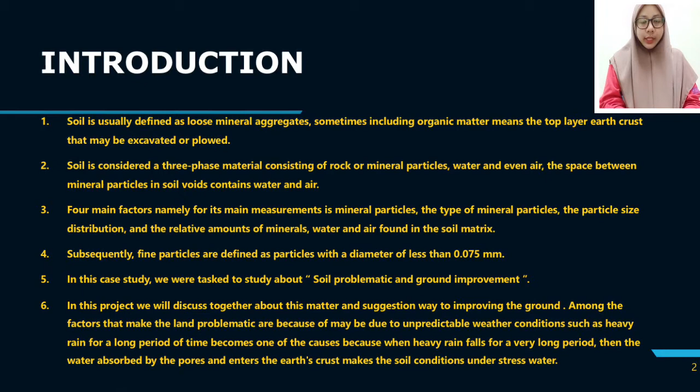So I will present about my part for the introduction. Okay, first we need to define what is soil. Soil is usually defined as a loose mineral aggregate, sometimes including organic matter, meaning the top layer of the earth crust that may be excavated or plowed.

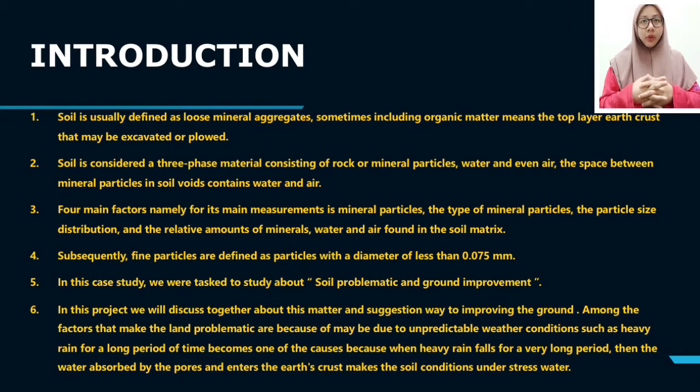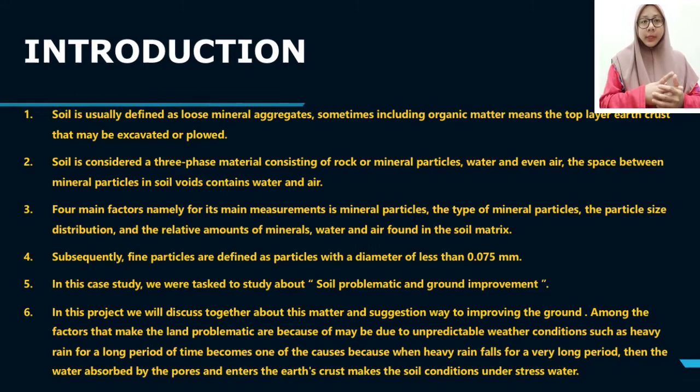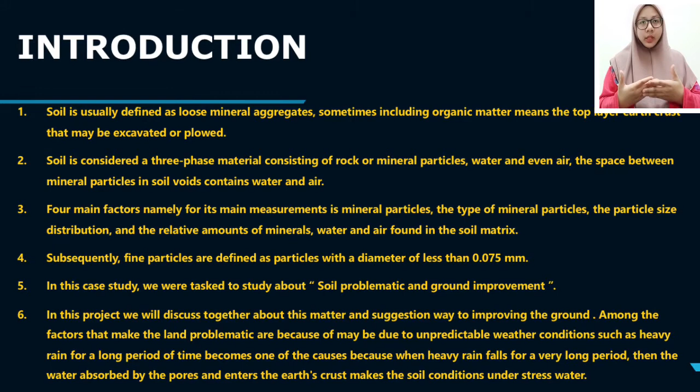And subsequently, fine particles are defined as particles with a diameter of less than 0.075 mm. So in this case, we were tasked to study problematic soil and ground improvement. In this project, we will discuss this matter together and suggest ways to improve the ground.

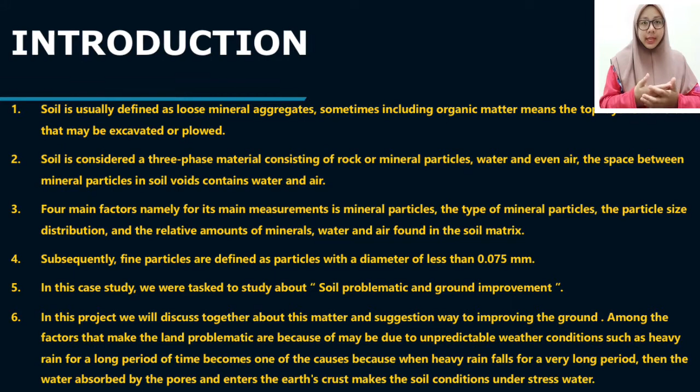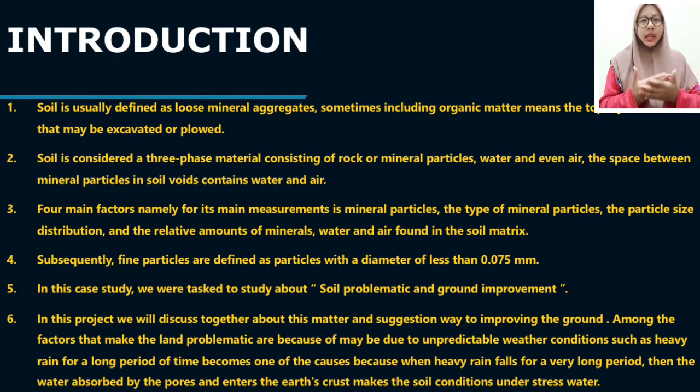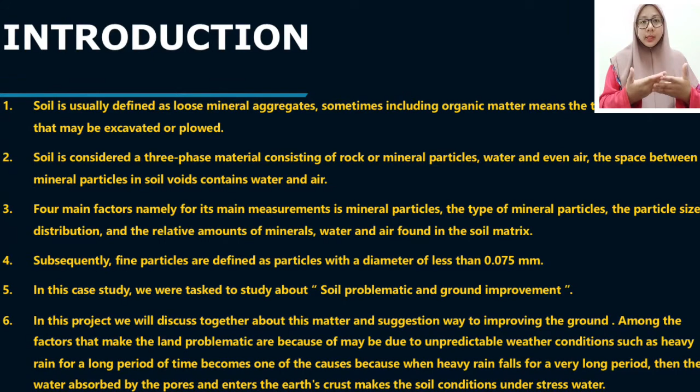Among the factors that make the land problematic may be the unpredictable weather conditions, such as heavy rain for a long period of time, because when heavy rain falls for a very long period, the water is absorbed by the pores and enters the earth crust, putting the soil under water stress.

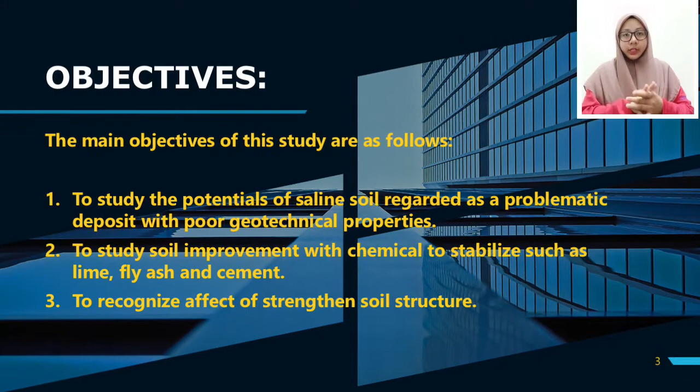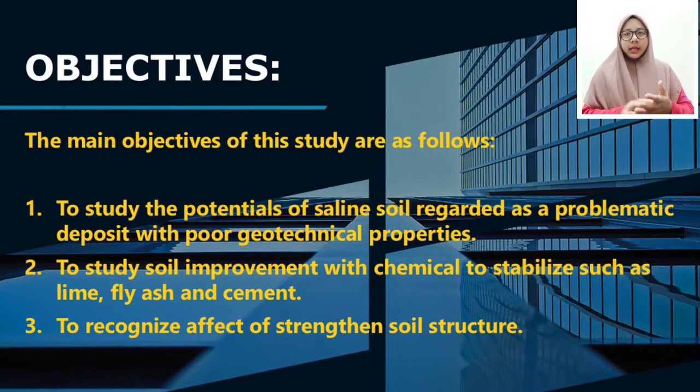For the objective, there are three main objectives for these studies. The first one is to study the potential of saline soil regarded as a problematic deposit with poor geotechnical properties. The second objective is to study soil improvement with chemical stabilizers, such as lime, fly ash, and cement. And the last, to recognize the effect of strengthen soil structures.

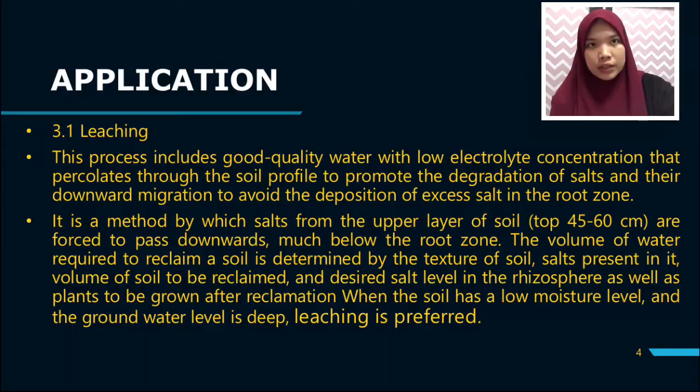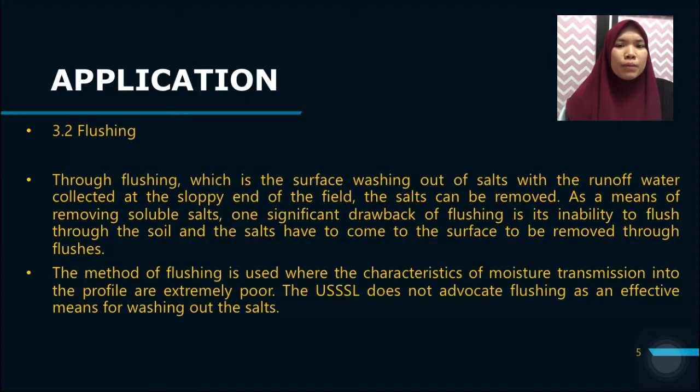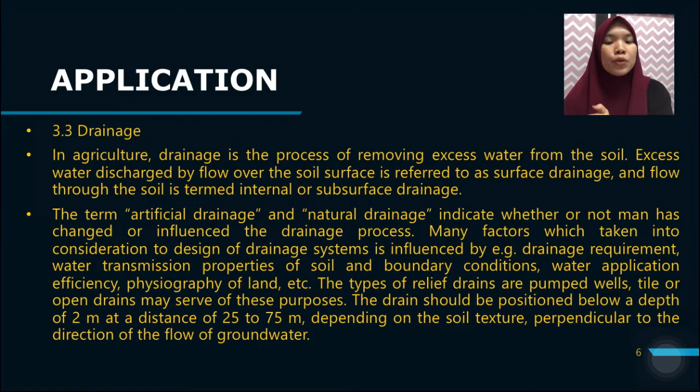It is influenced by the drainage requirement, the water transmission property of soil and boundary conditions, water application efficiencies, physiography of land, and so on. The types of relief drains are pumped wells, tiles, or open drains, and they may serve this purpose. The drain should be positioned below a depth of 2 meters and at a distance of 25 to 75 meters depending on the soil texture, and perpendicular to the direction of the flow of groundwater.

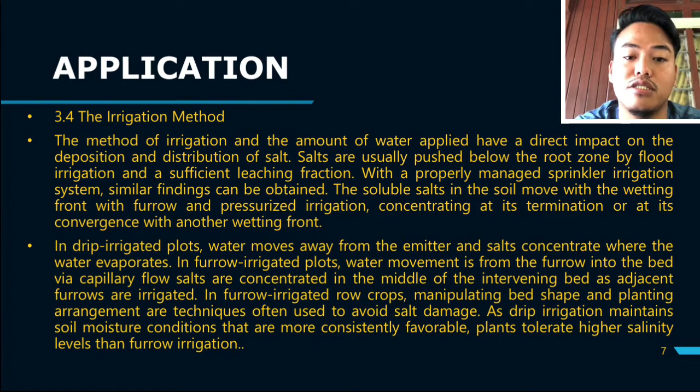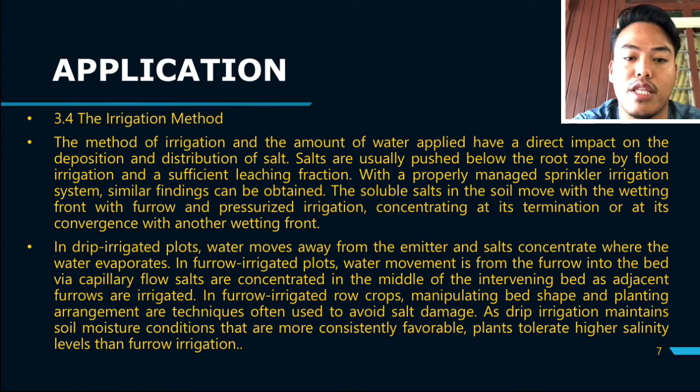For my part, I will explain about application, the irrigation method. The method of irrigation and the amount of water applied have a direct impact on the deposition and distribution of salt. Salts are usually pushed below the root zone by flood irrigation and a sufficient leaching fraction. In drip irrigated plots, water moves away from the emitter and salt concentrates where the water evaporates.

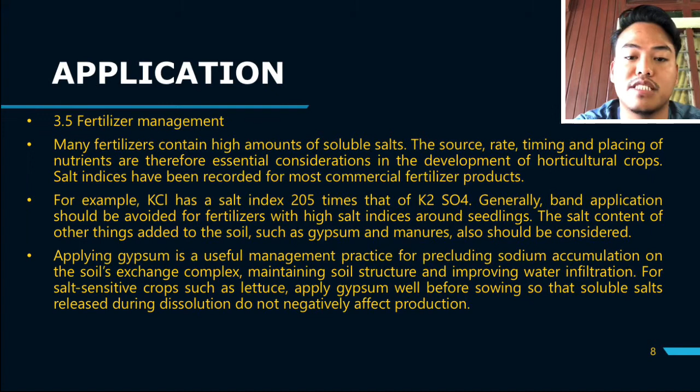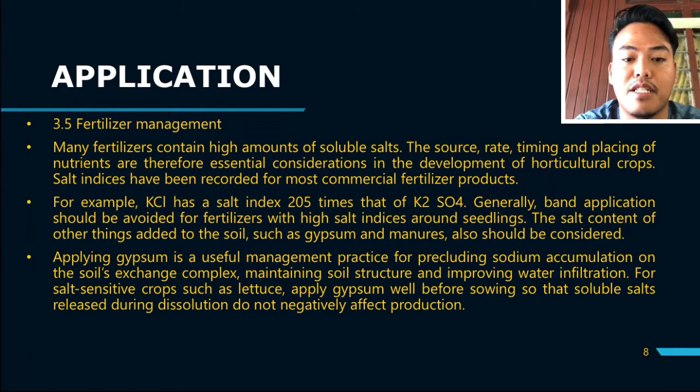Fertilizer management. Many fertilizers contain high amounts of soluble salt. For example, KCl has a salt index 2.5 times that of K2SO4. Generally, band application should be avoided for fertilizers with a high salt index around seedlings. Application 3.6, soil amendment and water treatment. Soil amendment and water treatment also provide a practical and cost-effective way of dealing with certain issues common to saline and sodic soil. Soil application of amendments is used for initial reclamation and long-term maintenance of soil quality.

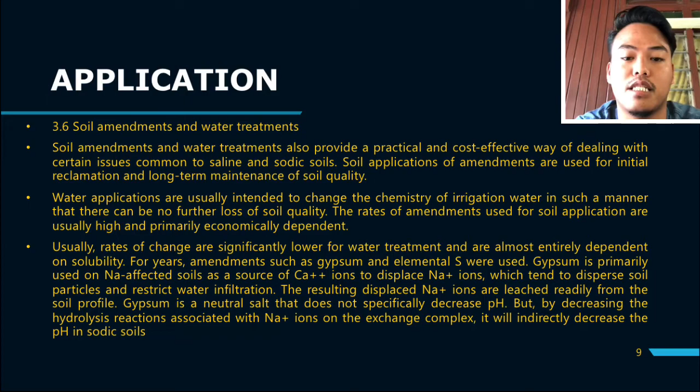So, I will explain about the case study. The type of soil that we use in this study is saline soil. Saline soil is when salt is present in the soil, blended in with water, and travels to the surface of the soil. Saline soil has mostly sodium chloride present in it. Saline soil can also be perceived by inconsistent development of harvest and regularly by the presence of a white crust on the surface. Soil salinity can also happen during irrigation. Soil that was once used for agriculture before construction can be saline, because during irrigation roots only absorb water, leaving salts behind in the soil, because every water source has some salt present in it.

As for saline soil, the causes and symptoms of salinity, sodicity, specific ion toxicity, and high pH are frequently confused. Salt is a constituent of nearly everything in nature. When there is groundwater fluctuation where salty water is discharged, or where topsoil is removed to reveal saline subsoil, natural salt deposits will occur.

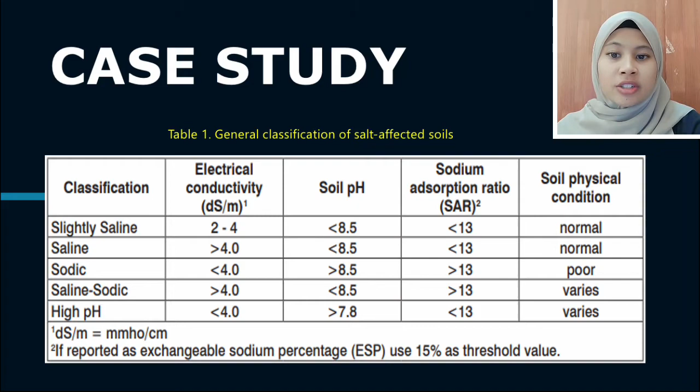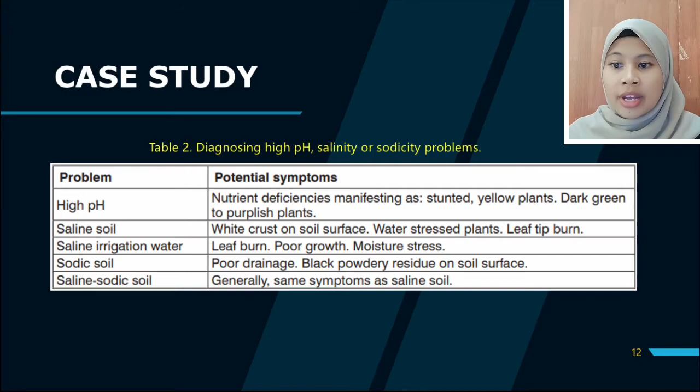And for sodic soil, it is poor drainage and black powdery residue on the soil surface. And the last one is saline sodic soil, where it's generally the same symptoms as saline soil.

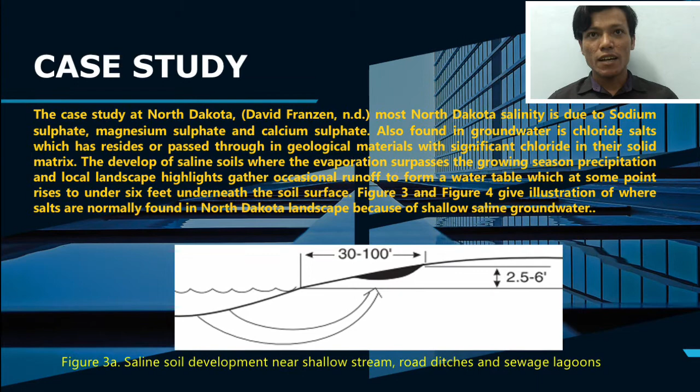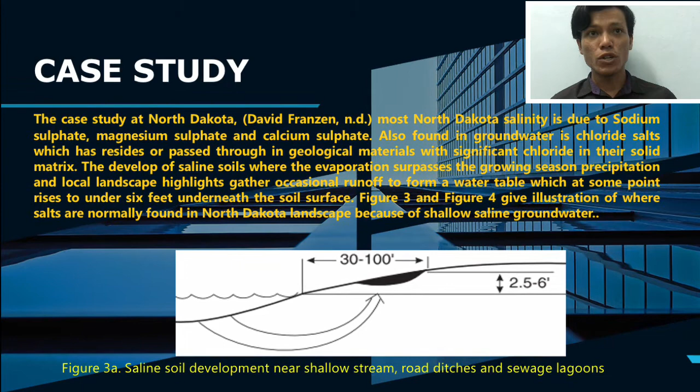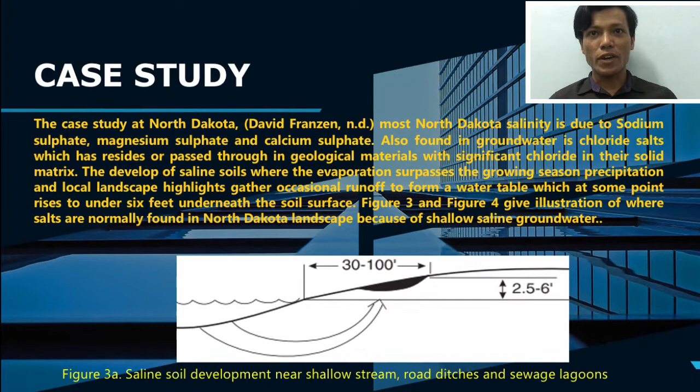I will present about the case study. The next case study is in North Dakota by David Franzen. Most North Dakota salinity is due to sodium sulfate, magnesium sulfate, and calcium sulfate. Also found in groundwater is chloride salt, which has resided in or passed through geological material with significant chloride in their solid matrix. Saline soil developed where evaporation surpassed the growing season precipitation and local landscape lowlands gathered occasional runoff during the growing season.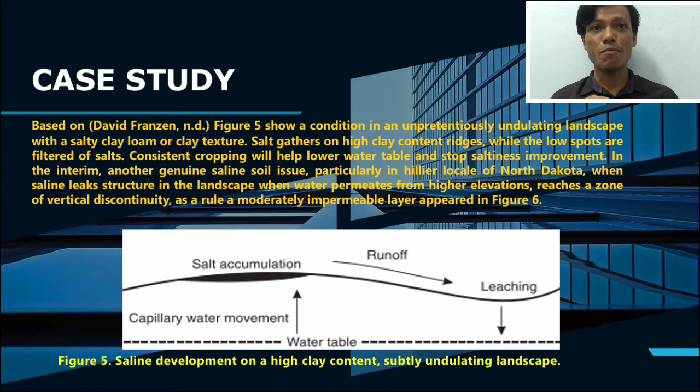Based on Mahmood Abdul Moeez from a 2016 case study, saline soil can diminish the moisture content of the soil and make it dry and rough. Moreover, the unit weight of the soil increases, along with physical problems such as high compressibility, low bearing capacity, and more expansion. The effect of dissolved salts on plant growth relies upon their concentration in the soil solution, which is measured at the standard field moisture content because of sampling problems.

Based on David Franzen, soil areas that are severely affected by salt often have a bright white, crusty appearance when dry. The severity of the saline area usually extends well beyond the obvious area. In areas lacking a surface crust or obvious vegetation loss, salts are dissolved in soil water and cannot be seen. So, modifying water management through appropriate irrigation practice is appropriate.

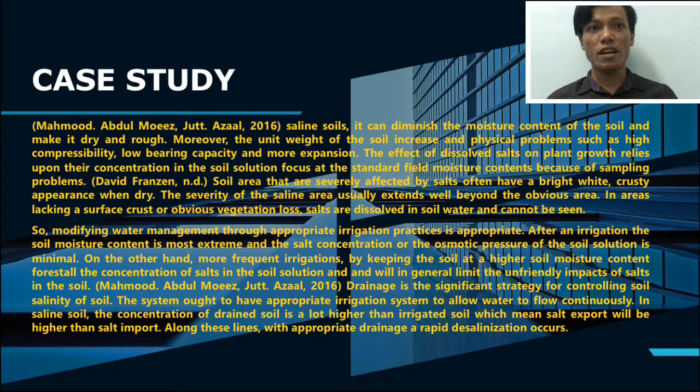After an irrigation, the soil moisture content is highest and the salt concentration or the osmotic pressure of the soil solution is minimal. On the other hand, more frequent irrigation, by keeping the soil at a higher moisture content, keeps down the concentration of salt in the soil solution.

In conclusion, soil is one of the most important aspects that engineers need to deal with in all types of construction. Soil is the first thing the construction phase begins with, so it is important that problematic soil and ground problems are handled well before the start of the project. So the requirements for the soil used in construction are prominent, as it is one of the factors for a successful project, as it is the strength and foundation of our building project.

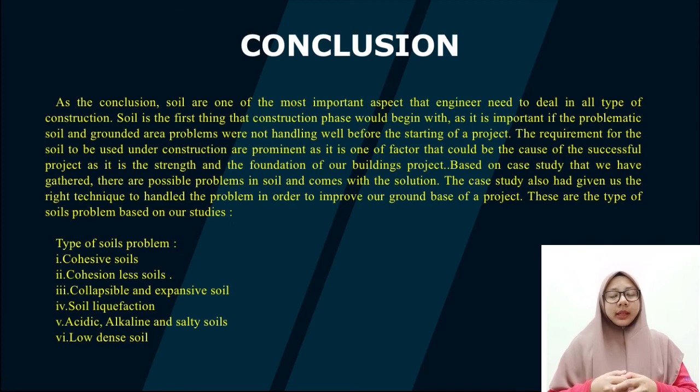So based on the case studies that we have gathered, there are possible problems in soil that come with solutions. The case studies also gave us the right techniques to handle the problems in order to improve the ground base of the project. So these are the types of soil problems based on our studies: cohesive soil, cohesionless soil, collapsible and expansive soil, soil liquefaction, acidic, alkaline and salty soil, and last is low density soil.